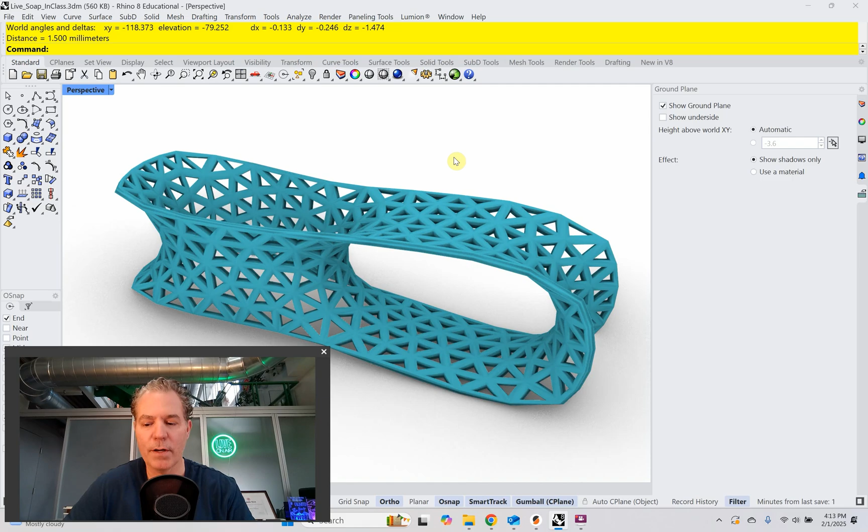All right, so let's take a little closer look at this geometry. So we're printing 4 inches by 4 inches, so relatively small. And I want to make sure that my minimum thickness is between 0.75 millimeters to 1.5 millimeters. Now 0.75 millimeters, that's really thin. These Prusa MK4 3D printers can print that thin, but you just got to expect some failure with some prints. Now in this one, I'm going to print a thickness of 1.5 millimeters.

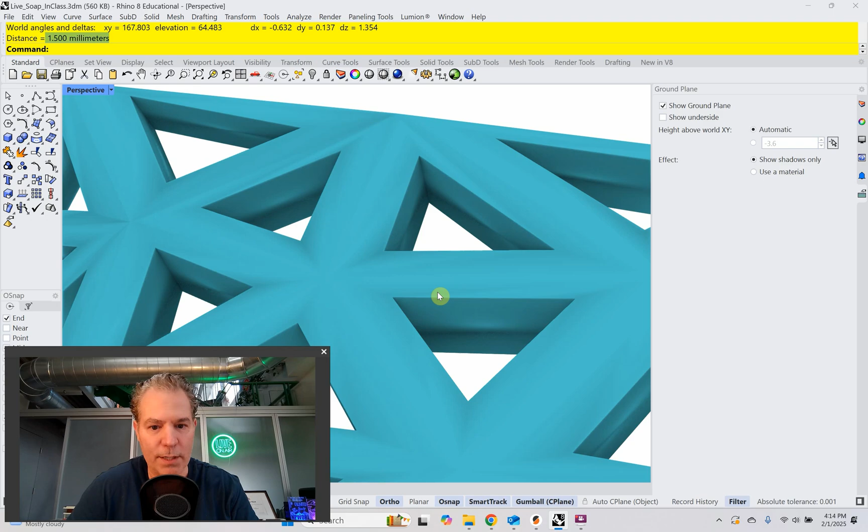So if I just take a distance here and go around snapping to my vertices, since this is a mesh, I'm seeing that 1.5 millimeters is really consistent. I can try another area too. So this is some really good geometry where we're seeing that it's all 1.5. So this is what we're going to bring into Prusa. So let's head over to Prusa.

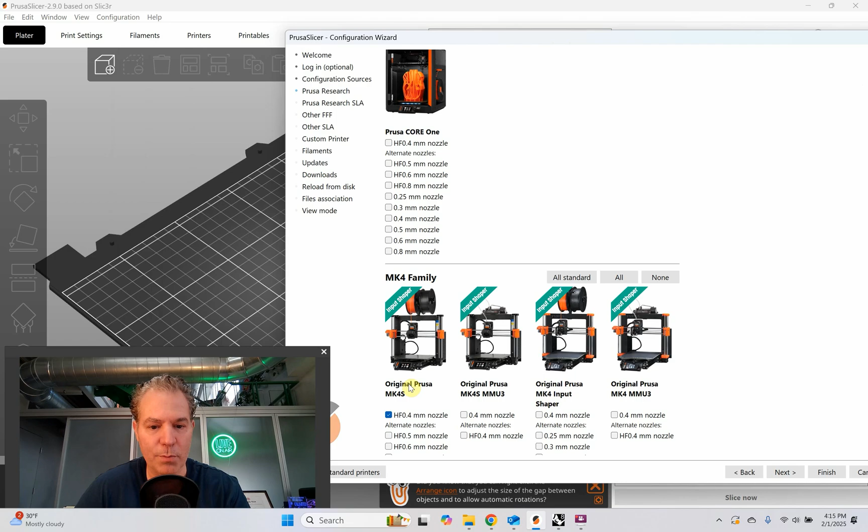The first thing you want to do in Prusa is set the printer that you're 3D printing to. So you want to go to configuration and go down to the configuration wizard. It's going to load in some files, and then it's going to open the configuration wizard window. In that window, you're going to select your printer from Prusa Research. And we're going to select the original Prusa MK4S with a 0.4 millimeter nozzle. This is a standard basic Prusa MK4 3D printer.

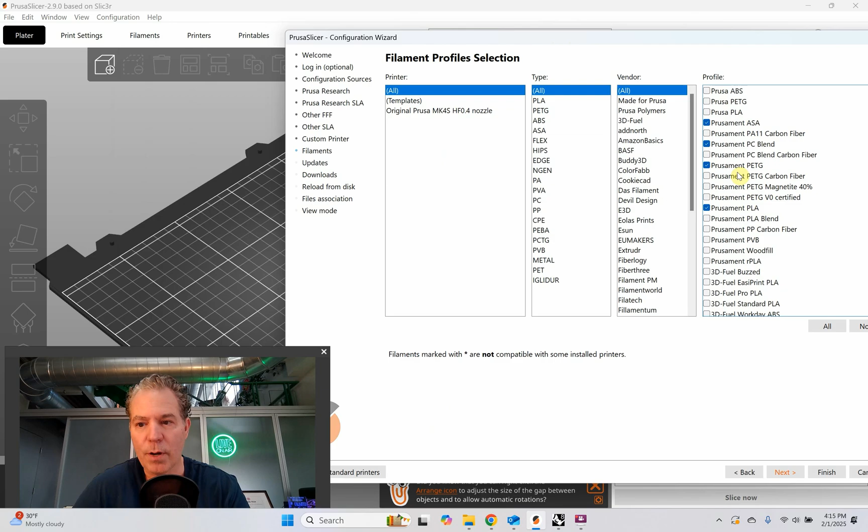Okay, so we're going to keep going through to the important pages. And the important page here is the type of filament that we're going to be using. That can vary for all of us. We're using PLA, but we might be using different brands. So I'm going to deselect all the Prusa filaments except for the generic. So I'm going to type in G and get down to generic, and I'm going to choose generic PLA. I'm going to uncheck Prusament PETG. I'm going to make sure that that's the only one that's checked in this list.

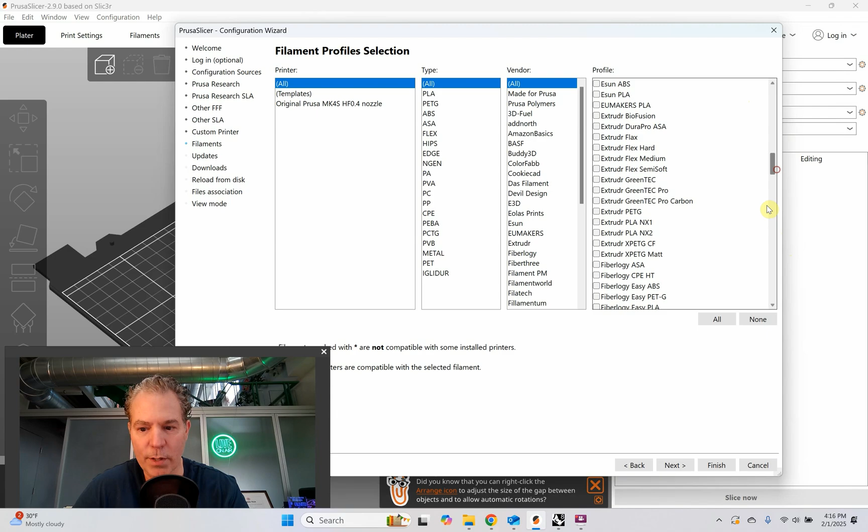Okay, that looks pretty good. Prusament PLAs need to be unchecked. All right. Generic PLA, that's the only one. And I'm going to go to next, and keep going through this till I get to the end. Just keep clicking on next. I want it to be in expert mode. That's not always the default, but I want to choose expert mode. And then we're using millimeters, not inches. It's just standard to use millimeters when you're 3D printing. All right, we can finish that.

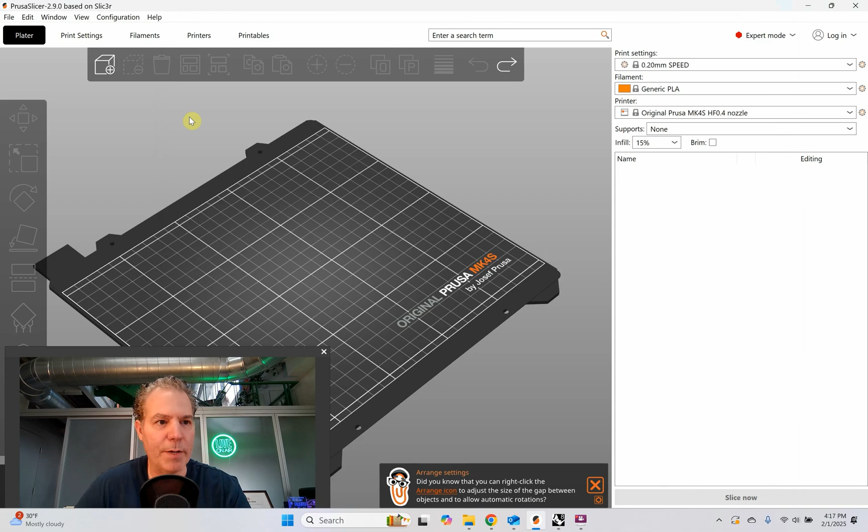Okay, so we're going to import our 3D print. We can do that with Control-I, or we can go up to the main menu and go to File, Import. We made an STL file, so we're going to import that STL file into the Prusa slicer, and that's to scale. We're working at 4 inches by 4 inches, or 100 millimeters by 100 millimeters. And you can see that here.

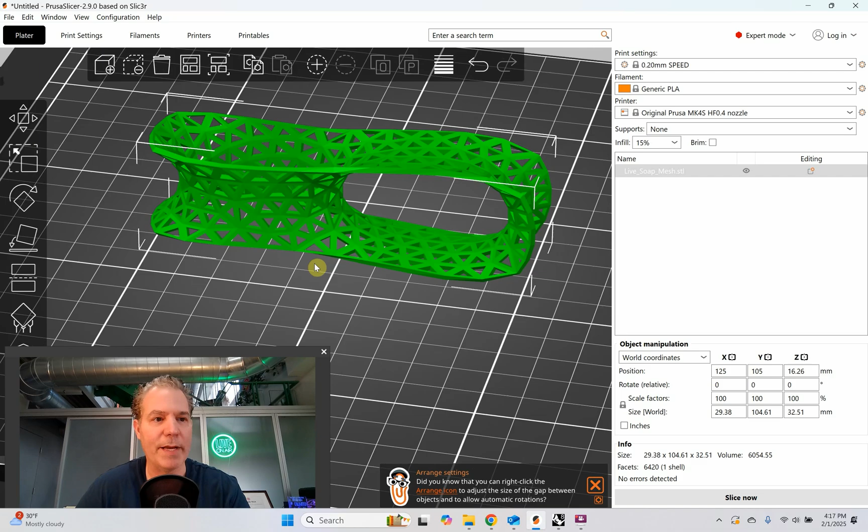All right, so I mentioned 4 things: base layer, layer height, infill, and support. Let's start with base layer. So we're going to go up to print settings, and we're going to go to skirt and brim. It's not the top one on the list, but it's skirt and brim. And we're going to want to make sure that our brim is turned on, not outer brim only, but outer and inner brim. I'm going to set that to outer and inner brim. So I want that to be my base layer.

Okay, the next thing is layer height. We can get that from the top of the list, layers and perimeters. The layer height default is 0.2. If you want a fine 3D print, you're going to want to use 0.1. If you want a quick, fast 3D print, you're going to want to use 0.3. 0.2 is right in between, so we'll stick with the 0.2. The first layer height, you want to make that a little thicker so that you get more adhesion with the base plate. So I'm going to make that 0.35. Okay, that's my layer height.

The next thing is my infill. That's the second on the list. For these complex geometric forms that my students and I are always making, they are very thin structures. They're very thin walls. They don't require an infill. So I'm going to go ahead and set that infill to 0%. All right, that's really quickly base layer, layer height, infill.

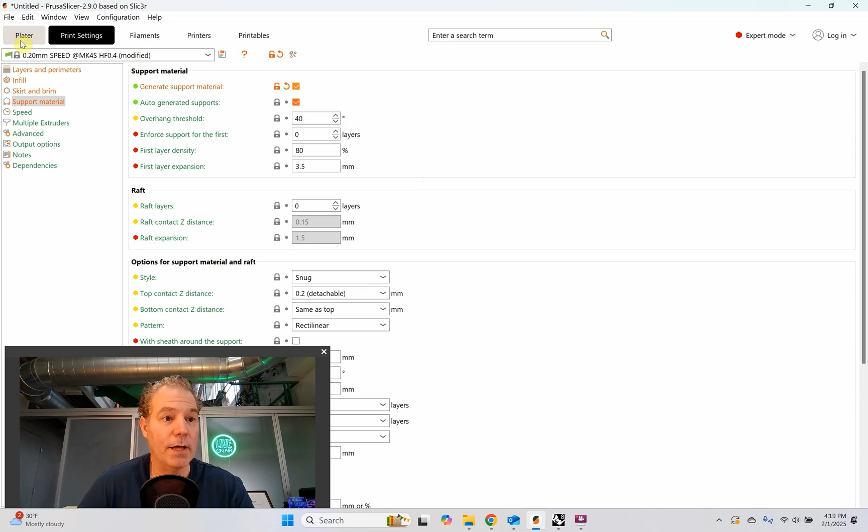The next thing is the key, which is support. So we're going to go to support, and we can go to generate support material. We definitely need to check that on. Then there's auto-generated supports. So let's just see what the default looks like. So let's go to Plater, and we're going to be working in the lower left.

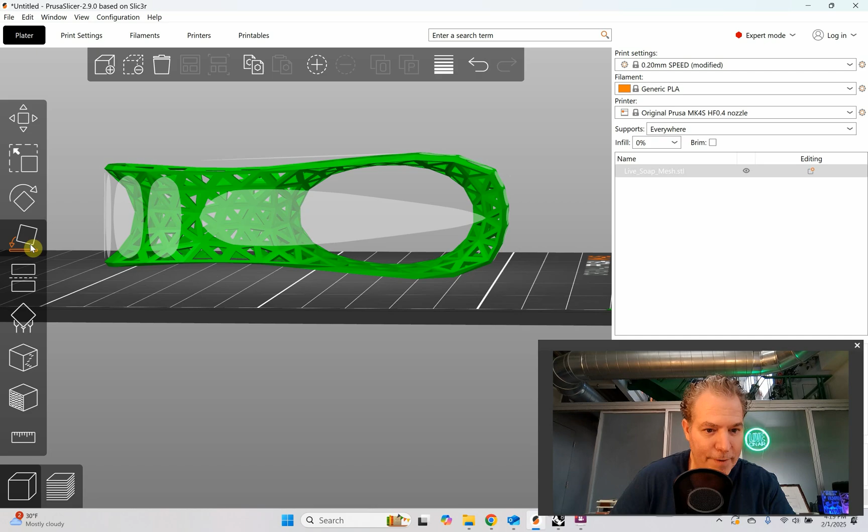So I'm going to move myself over here. One thing I want to show you before we jump into taking a look at all these settings is the placement. You can see this thing is floating. Right here, it's floating. So I'm going to use the place on face, and I'm going to orbit and click the bottom. And now that has rotated. If I go to the undo, redo, you can see that. So that's a really helpful tool, the place on face.

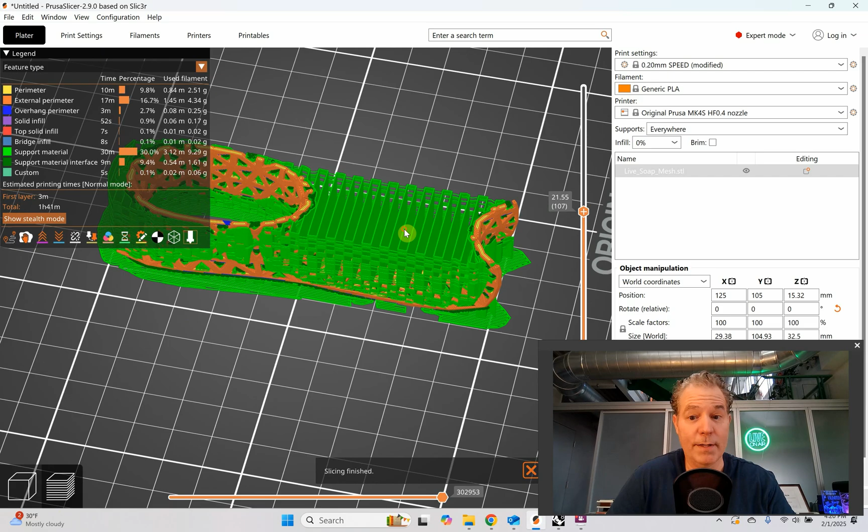All right, so let's take a look at what this is going to look like in the slicer. I'm just clicking on this little button over here. Look at all that support. That is going to really suck. That's going to take forever to take out, and the 3D print's going to look terrible. There's just way too much support in there.

Now, you can reduce the support if you look at the angle at which it applies support. I can go to print settings, and I can look here. This is the overhang threshold, okay? The overhang threshold. So higher values will give you more support.

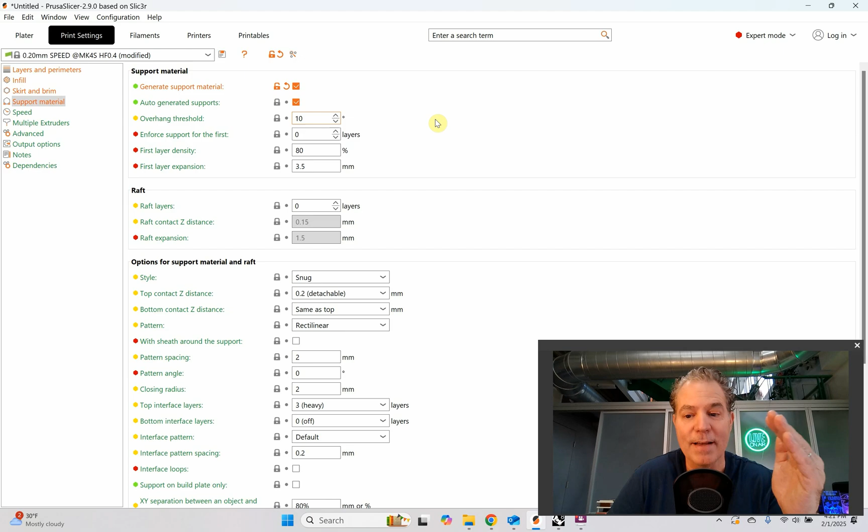Lower values will give you less support, because lower values only apply to angles of what you put in and lesser. So if I put in 10 degrees, it's only going to apply support to 10 degrees, 9 degrees, 8 degrees, and down to 0. If I put in 60, it's going to apply to 60, 50, 40, 30. So the higher values are more support. The lesser values are less support.

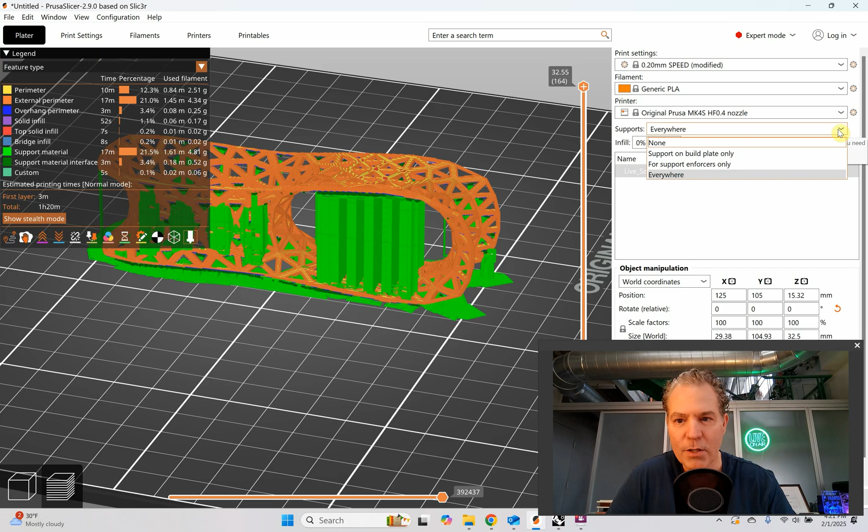Let's see what 10 looks like. So we'll go back to our Plater. Got to click on the little square on the left, click on the preview, and you're going to see a lot less support. A lot less support. And the supports are set to everywhere here. You can choose support on build plate only, and you're going to get a little better result with that.

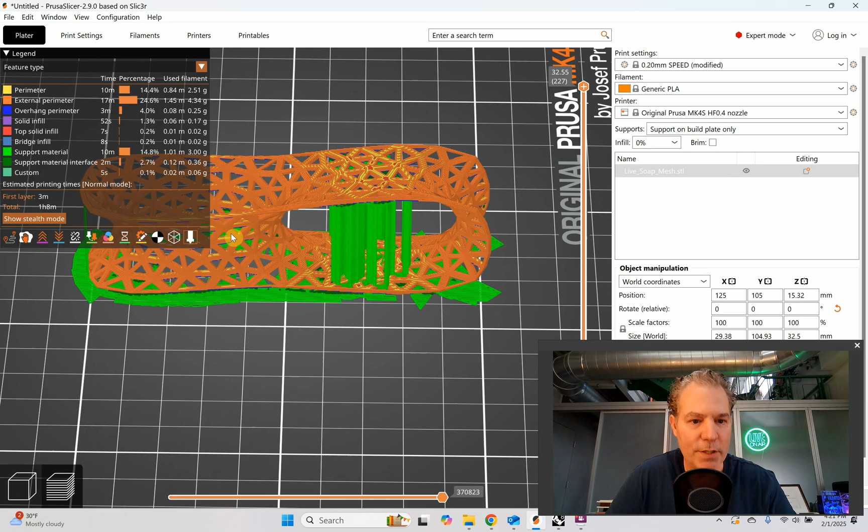So if we take a look at that, it's not supporting within the geometry. Now, everything has consequences, right? Things can still fail. But if you notice, these supports are only coming up from the build plate. They're not going from geometry to geometry to geometry, only from the build plate and up.

Well, friends, we have a better way to do all this. We're going to do this through organic supports. So where are organic supports? Let's go to print settings. Let's go to style, options for support material and raft. There's snug and there's grid. Now the default is typically grid. Grid and snug are a little bit different, but I want to look at organic.

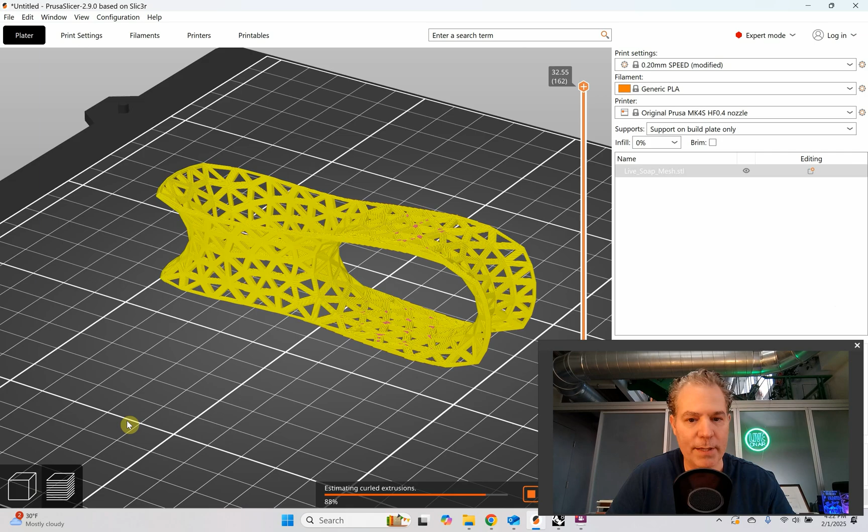So I'm going to click on organic, and I'm just going to go to Plater, click on the first button, click on the second button here, let it generate. And you're going to see this amazing tree structure that's generated. This is really great. If I scroll this slicer down, we can see this tree structure. These are really easy to break away, and they're really clean where they touch the 3D model.

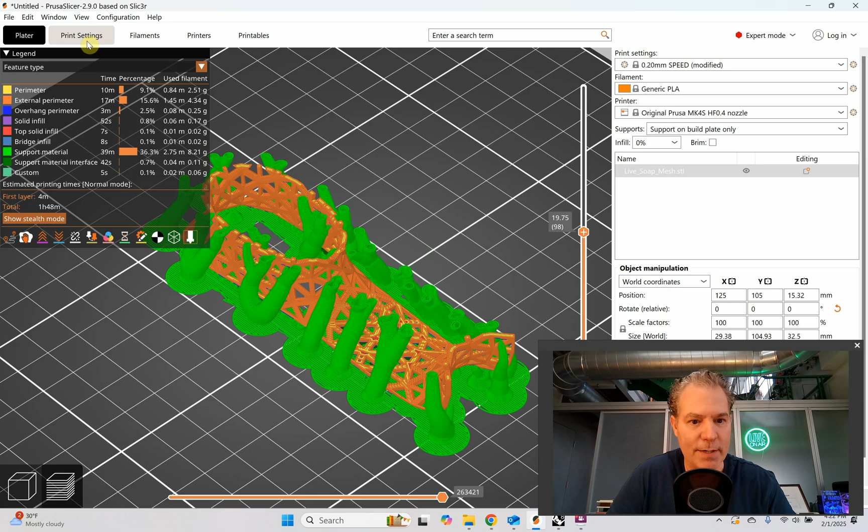Let's go back to print settings. Okay, one thing that you're going to see here is top contact Z distance, and that's 0.2 detachable. So it's 0.2 millimeters from the geometry so that it can break away. You want to make sure that's set, and I'm pretty sure that's default. Now, if we go all the way down to the bottom, we're going to see a whole bunch of settings for the organic supports.

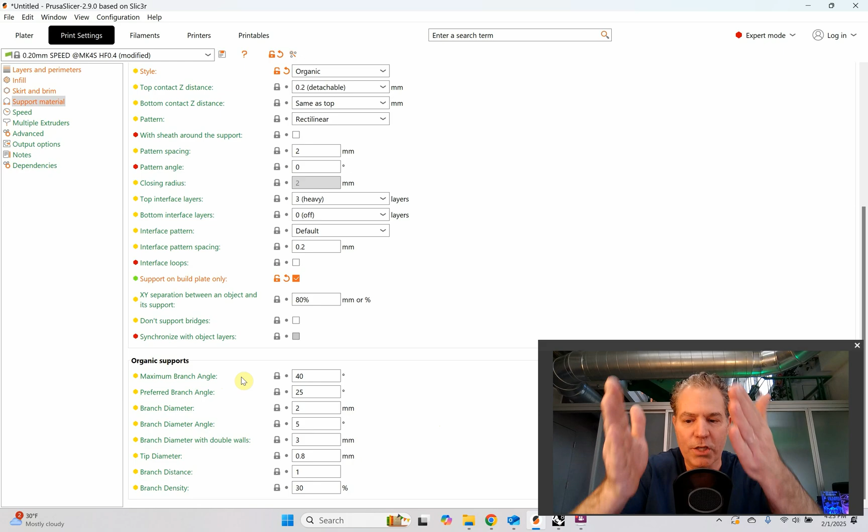Now, organic supports are generated in what's called vase mode. So they just have a thin outer shell, which is really great. But you can change some things like the maximum branch angle, the preferred branch angle, the branch diameter angle. And the best thing to do is just click on these.

All the settings are links in Prusa, and you can click on this, and that's going to bring you to a web page where you're going to see a whole lot of information about what you clicked on. So that's super helpful. Organic supports, you can read all about that. But let's take a close look at some key settings here.

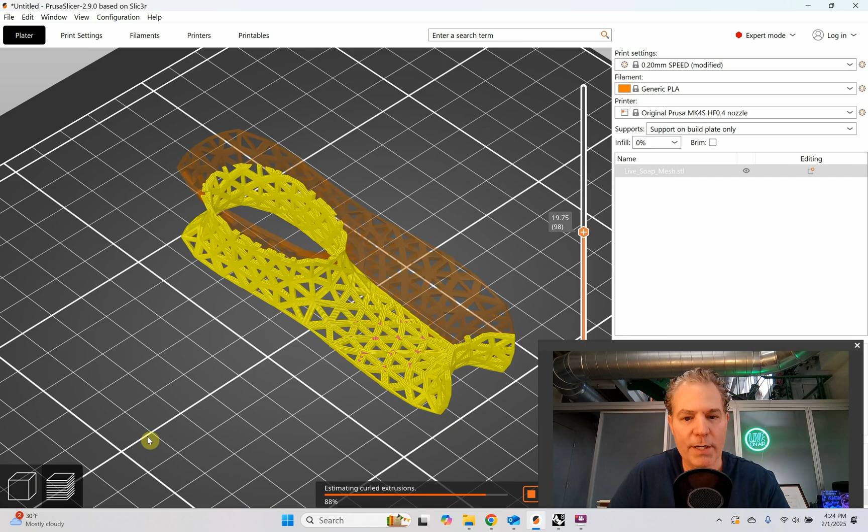Okay, the easiest one is just to look at the branch diameter. So if I put in 5 here, and I go to the Plater and I click on the left button, click on the right button, let it generate, we're going to see huge diameter branches. So, again, it depends on the print that you're making, how big it is. This is a small scale print. So my branch diameter, I'm going to make that 1.

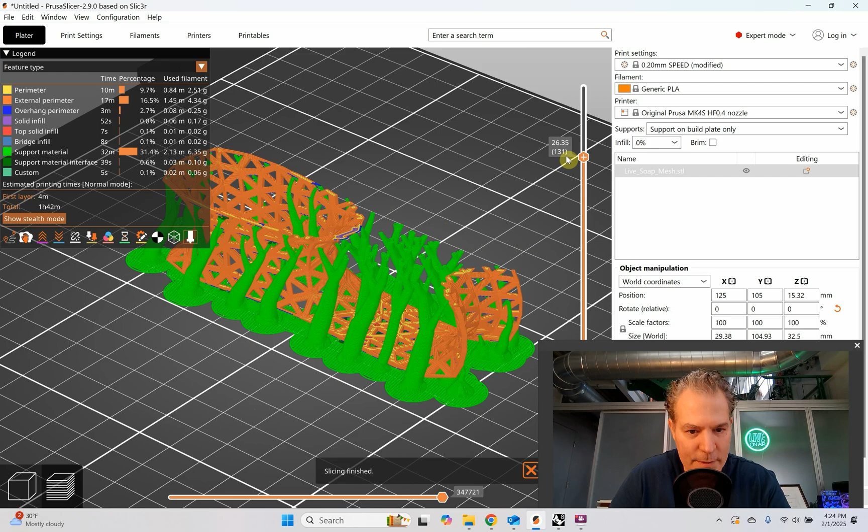Okay, let's take a look at it. You can see that those are much thinner. If I bring this up, you can see those are much thinner. Then there is the branch density. Let's take a look at that. Branch density is down at the bottom, and 30% is shown here, and I put that setting in. 15% is the default. So the smallest I think I can make the density is maybe 5. It might be 10. Let's see.

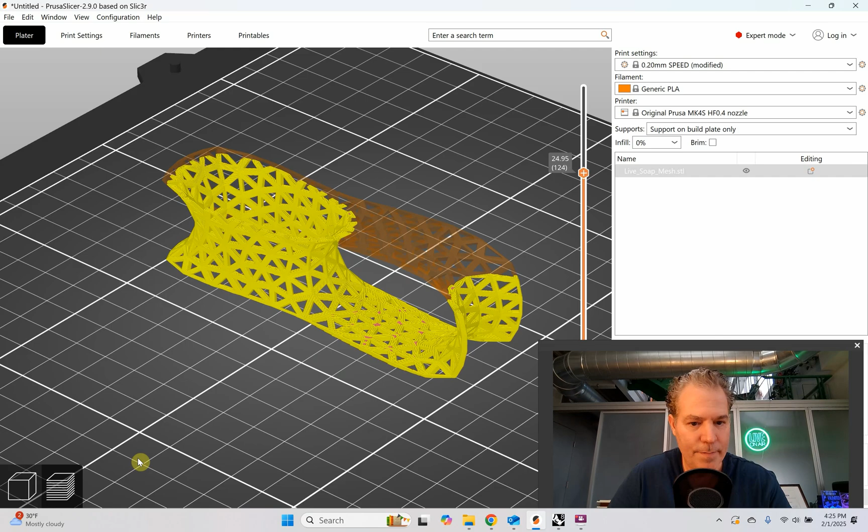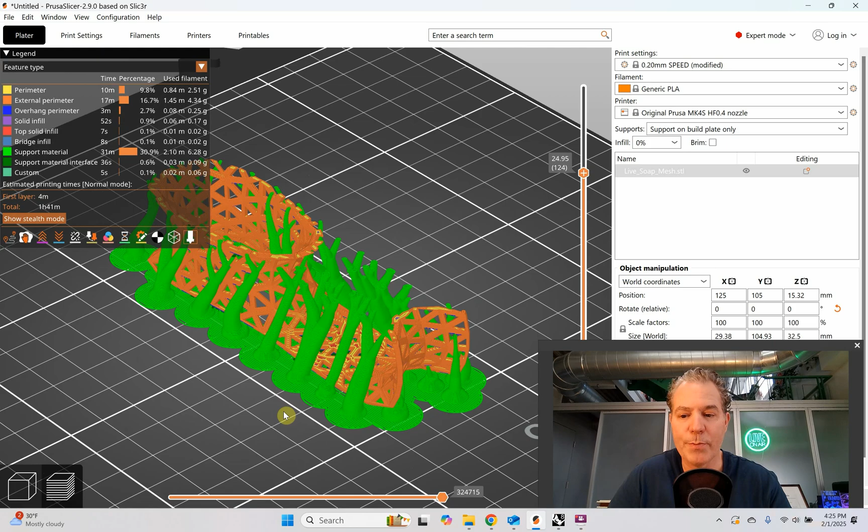It took 5. So these branches are less dense. Less dense can be helpful with having a cleaner 3D model because there's fewer points of contact. More density you might need for certain areas. This is all by experimentation, but this is the way that you can 3D print complex geometry.